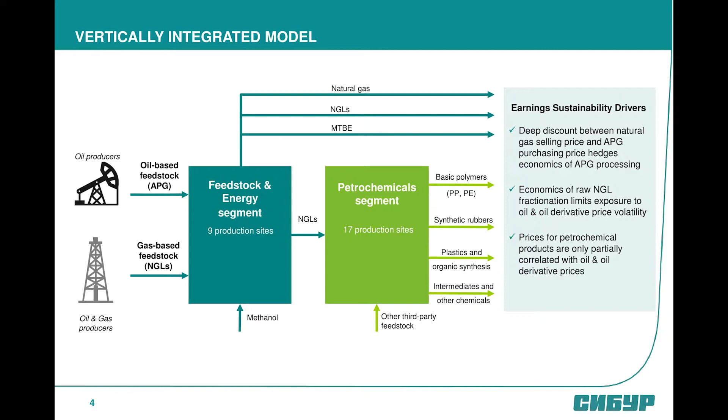To give you a brief explanation of the business model of SIBUR, we started with our feedstock and energy segment and explored the vertically integrated approach to build up our value chain segments. So we split the basic activities into 2 parts. The first one is feedstock, the core energy business for us, and the next level is petrochemical segments, which include not only the intermediates, organic synthesis products, but also the basic polymers, I mean polyethylene, polypropylene products,

and also synthetic rubbers. And the key point for the SIBUR strategy is to be on the safe side for our feedstock availability, and to have self-sufficiency in feedstock supply. So we have long-term partnership cooperation with oil and gas companies who provide us with feedstock material, I mean associated petroleum gas and natural gas liquids that are coming to our processing plants, gas fractionation plants, which then give the feedstock to our petrochemical units.

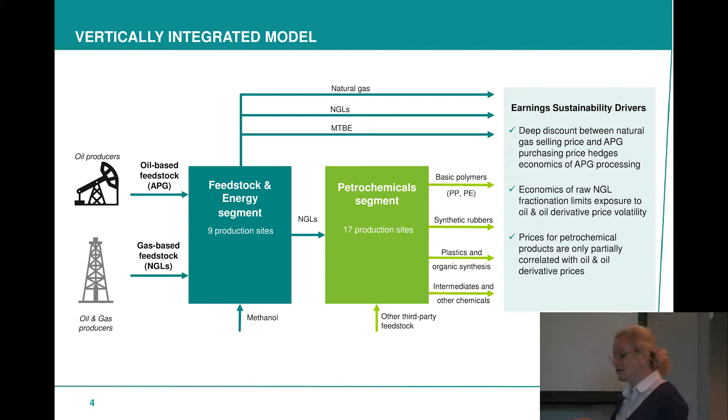And last year was the first time when the total revenue from the feedstock businesses was less than the petrochemical business. So we are growing, and we are growing exactly in petrochemical segments. So we are intentionally moving from the model of feedstock supply to the value-added chain, to the higher molecules.

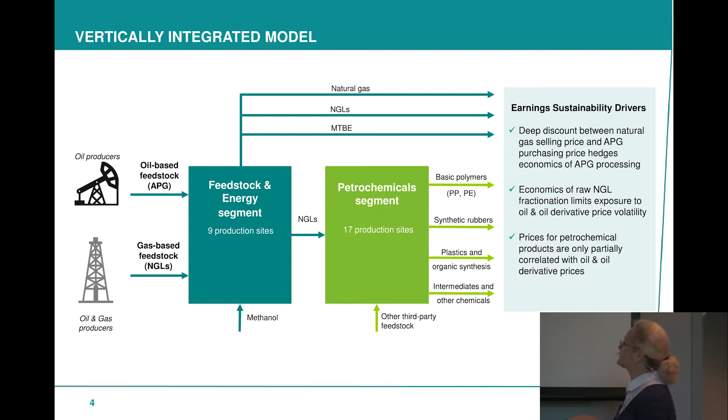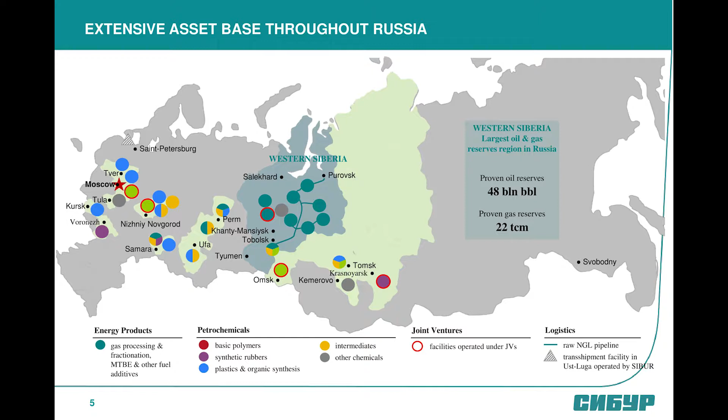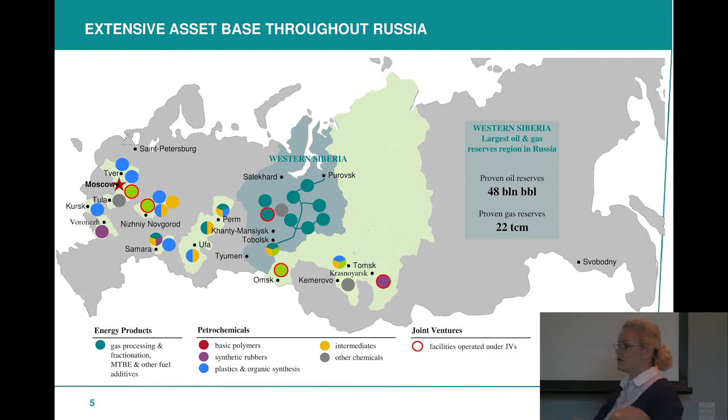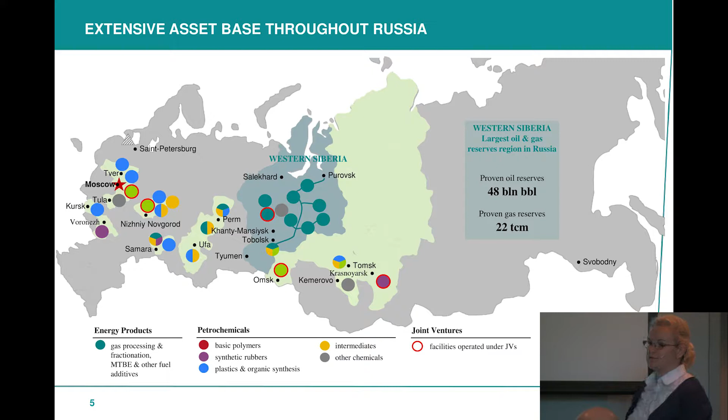Again, if we are looking at the map of SIBUR activities throughout Russia, due to the feedstock reasons, the core business is located in the West Siberia region. And SIBUR operates and manages the longest network of NGL pipelines in Russia, with the largest capacity of gas fractionation units in Tobolsk. So this is the heart of our businesses in West Siberia.

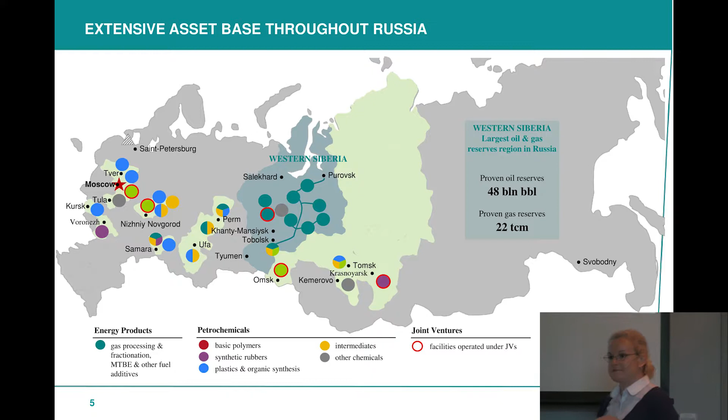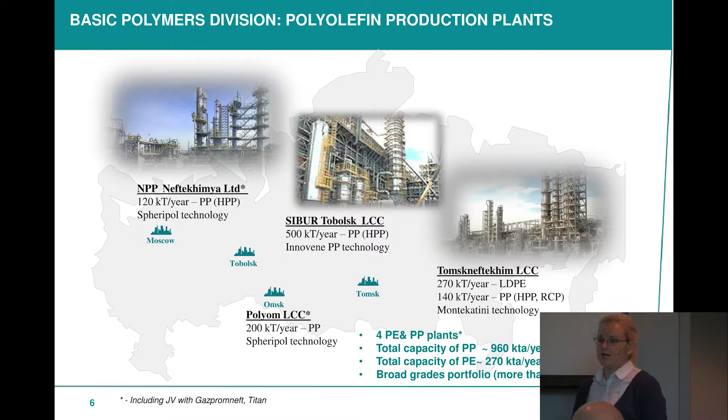If we're talking about the basic polymers business unit, which I present, we are talking about 4 units with total capacity of more than 1.2 million tons of polyolefins, and 3 of them are located in Siberia, and 1 is located in Moscow. If we are looking at the volumes, we need to note that these 2 plants were started only 4 years ago. So these are the latest technologies, and we operate world-scale capacities and quite new ones.

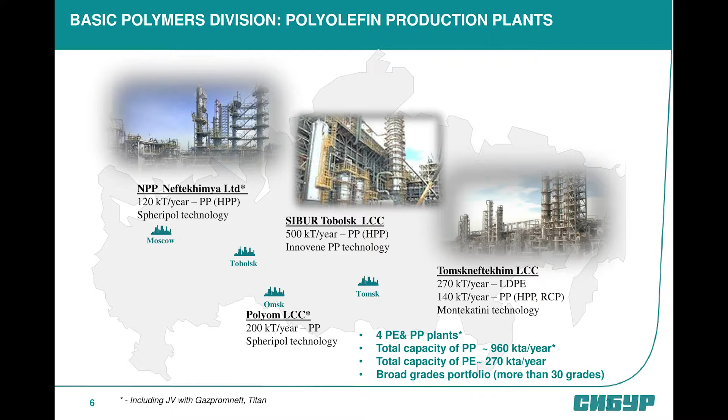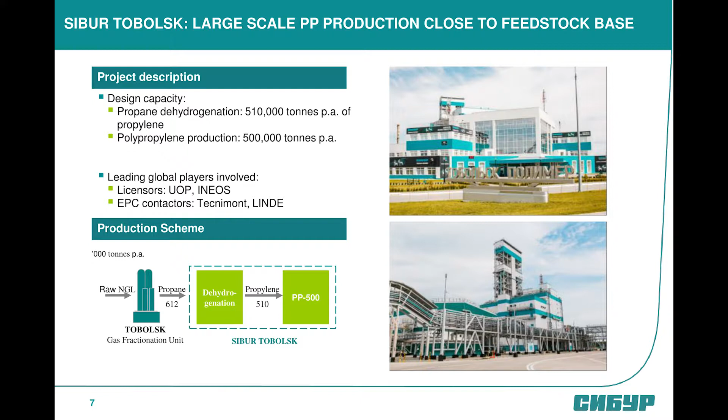The specific details I would like to share with you are about our Tobolsk location. This is the largest PDH unit that could consume all the propane coming from the gas fractionation unit, which then goes to the largest polypropylene capacity in Russia. So this project, which was started in 2013, was the first large-scale project and demonstrated our confidence in creating value-added projects.

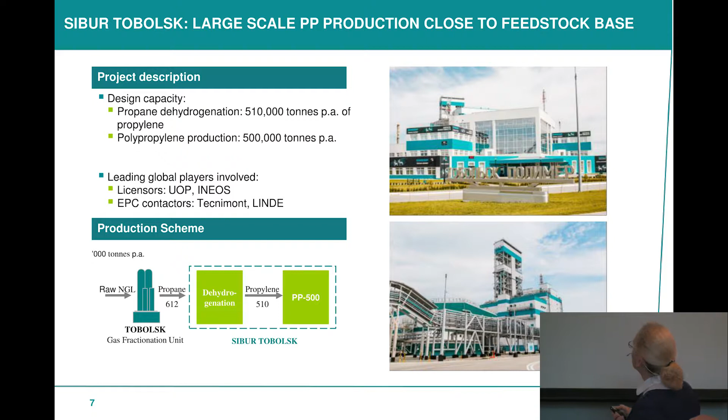In our key portfolio, we manage the broadest applications in polypropylene and also in low-density polyethylene. In collaboration with our clients, and this list is not the full list, we are interested in developing and investigating potential new applications with our clients for our mutual growth,

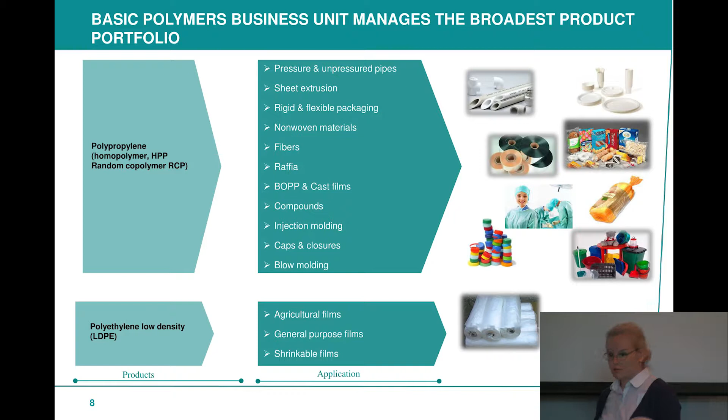and searching for new applications for the new products. Last year, SIBUR introduced its own brand name for polypropylene and polyethylene, and we take responsibility for the product quality, the services we provide to our clients, and stable supplies to our long-term partners. So the SIBUR brand covers most of these applications in polypropylene currently.

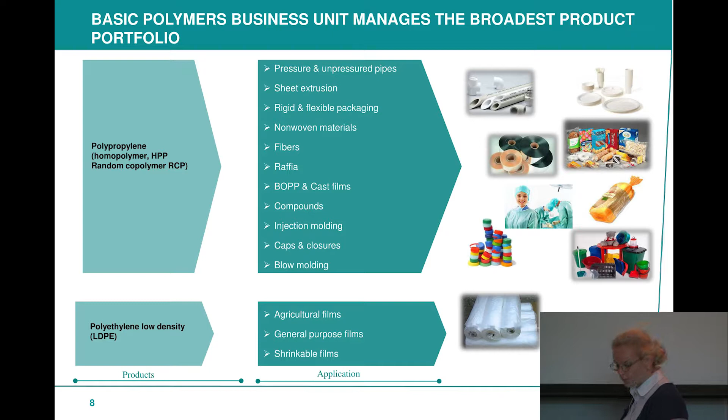It should be noted that we couldn't explore and develop most of these applications without the support of R&D activities. And here I'd like to present my colleagues from our NIOST R&D center, which is located in Tomsk. This is also in West Siberia.

And the NIOST center covers not only the basic polymers unit's requirements for materials development, but also the requirements of other SIBUR businesses, like the gas processing plant, development of petrochemical synthesis, catalysts, plastics and compounds, and also testing of additives for polyolefins and rubbers. So a very broad range of services. So next, move to the future.

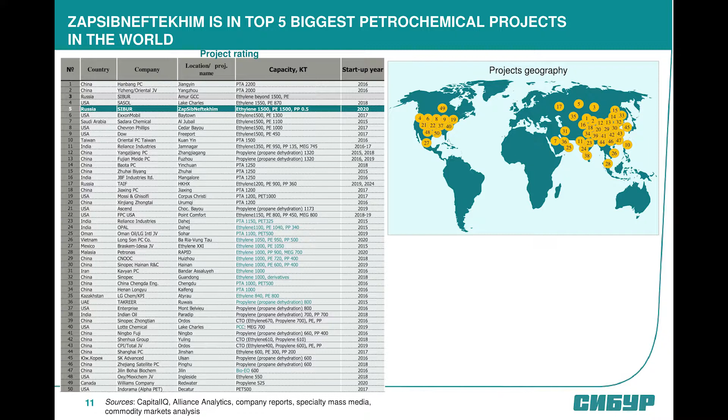I'm pleased to announce to you the coming project, which is currently under construction, and as you could guess, it's also located in West Siberia, specifically in the Tobolsk area. It's under construction and it will be started in 2020. It will take a place in the top 5 list of the world's largest petrochemical projects. And again, it will be a fully integrated complex, with our own feedstock supplied to the cracker unit and then polyolefins capacities.

If we look at the structure of the project configuration, this is the cracker, mostly a light feedstock cracker unit with 1.5 million tons capacity of ethylene and half a million tons of propylene, which goes to the 5 independent polymerization units. 4 of them are polyethylene and one is polypropylene.

And for our Tobolsk plant, we currently operate the same capacity in Tobolsk, so it will mean that we double our polypropylene capacity and will add 1.5 million tons of polyethylene. So in terms of the total volume, the total capacities in Tobolsk will increase 5 times. It's a big challenge for all parts and business units within the company, and we are preparing for the future. And really, we started it more than a year ago, I would say.

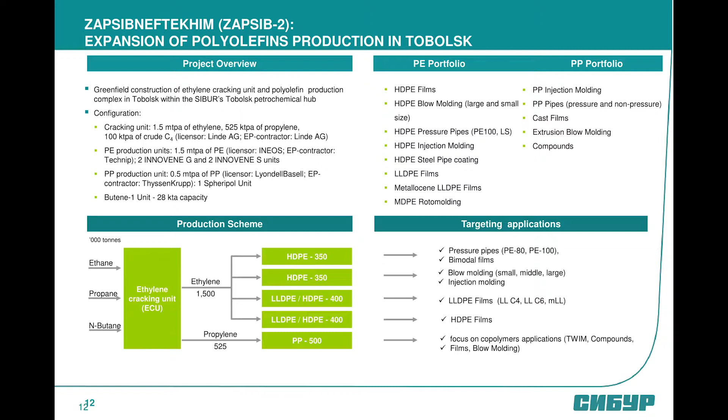Here I'd like to share with you our targeting applications, which our capabilities and technologies could offer us. In terms of polyethylene, of the 4 units, 2 of them are shown here, the first and the second. This is slurry technology, the Innovene S license, with capabilities for bimodal applications and pipe applications, and the third and the fourth are gas phase units, each with a capacity of 400 kTA, which gives us the capability to produce linear low density polyethylene and high density polyethylene.

These 4 independent units give us an exceptional advantage in flexibility of the portfolio within the broad range of polyethylene applications. For sure, our preliminary approach is to focus each line on targeting applications to avoid any difficult transitions and improve the operation efficiency.

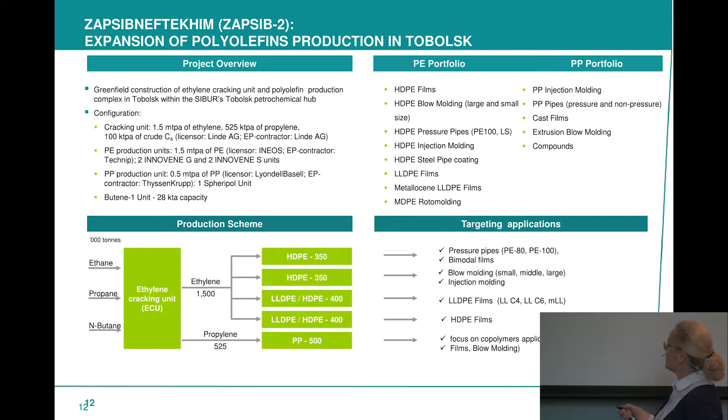In the case of polypropylene, this is LyondellBasell's Spheripol technology, and as far as most of our portfolio is focused on homopolymer polypropylene, thanks to ZapSibNeftekhim capabilities, we will focus mostly on impact and random copolymers.

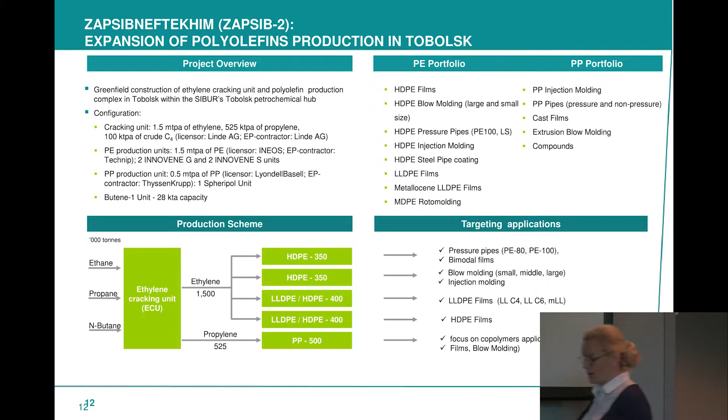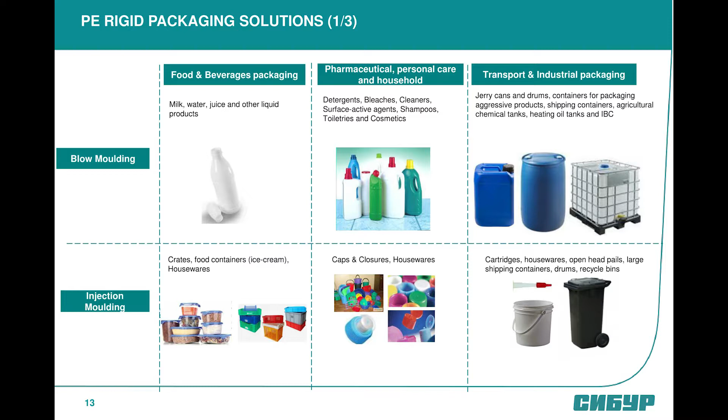Here I just briefly give the pictures of the main applications as we currently divide them ourselves. For us, it means different requirements from our clients depending on the processing technologies and depending on the final use. So for blow molding, we split small blow molding between food packaging and household, and medium size and large blow molding for industrial and transportation packaging.

For injection molding, the same approach with crates and containers, different types of houseware for food packaging, caps and closures, certain types of material needs, and also housewares and large size articles.

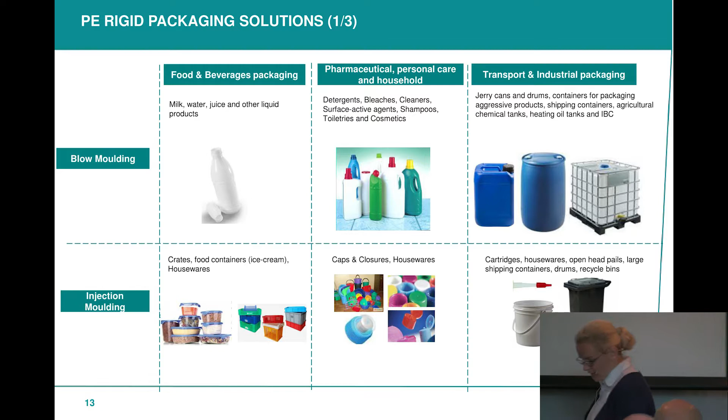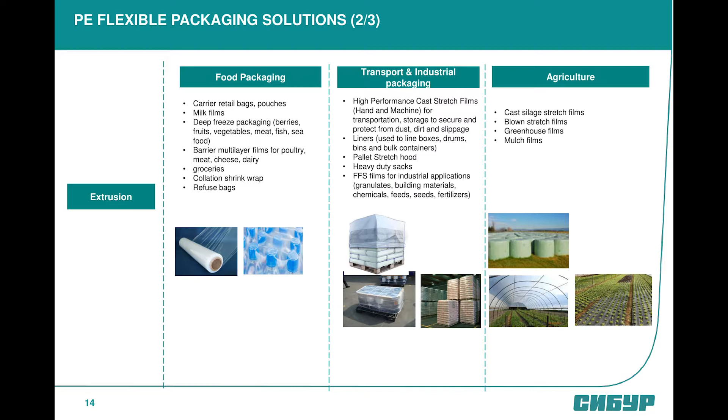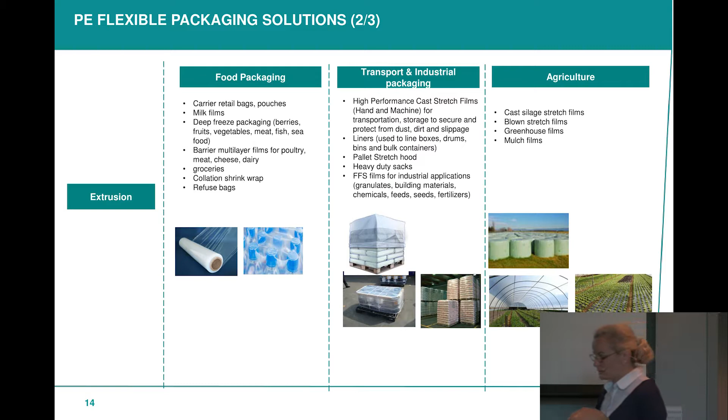For flexible packaging, we are firstly interested in expanding our portfolio. We currently have a good footprint in low density polyethylene thanks to our Tomsk plant, and we expect to have a synergy effect with the full range of polyethylene we could offer, with high density polyethylene, linear low density, and low density polyethylene for flexible packaging.

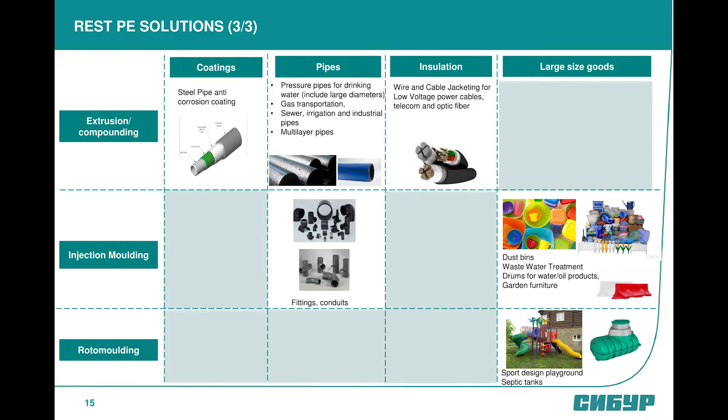Within the rest of the applications, the key point for us is the pipe segment. This is a crucial, important application for us at the local market and not only. For sure, one of our slurry PE units will be focused mainly on black bimodal PE100 black compound for drinking water and gas transportation.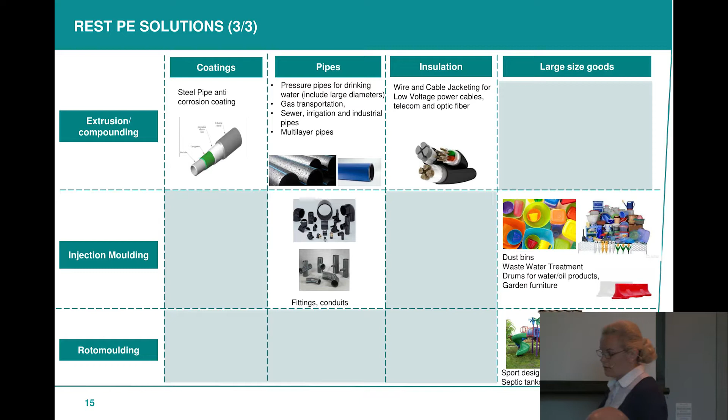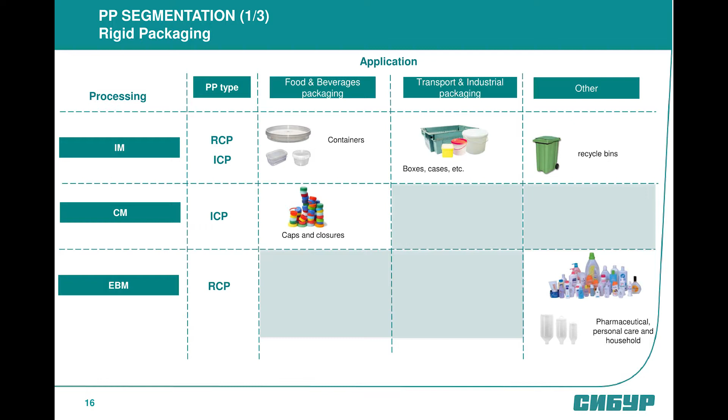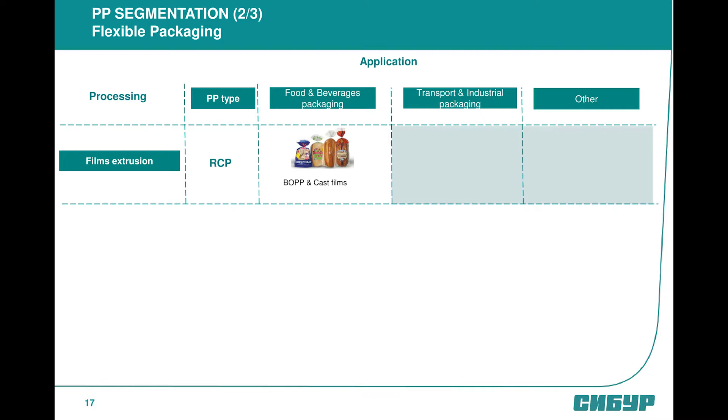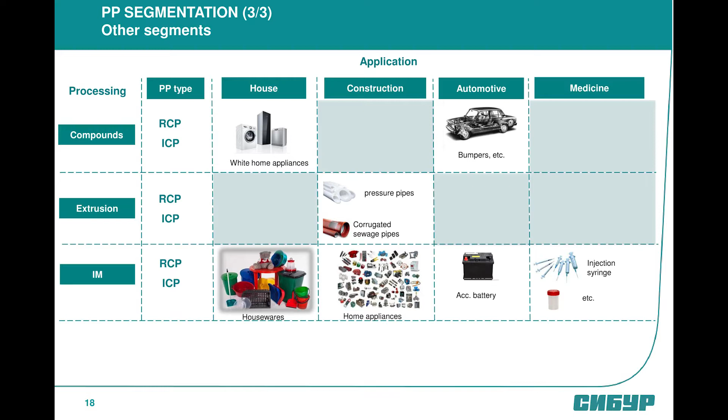In the case of polypropylene segments, we are focused on copolymers to expand our portfolio with random and impact copolymers. For the first step, we are looking at packaging, thin wall injection molding packaging, and films applications, and also we should pay attention to the compounding business for the home appliances and automotive industry.

For the pipe applications in PP, we currently supply random copolymer material, but only to the local market. But again, with new capacity, we expect to expand our portfolio of material for PP pipe applications.

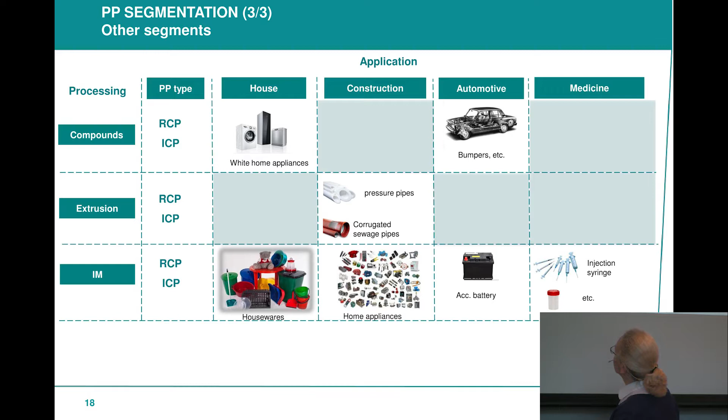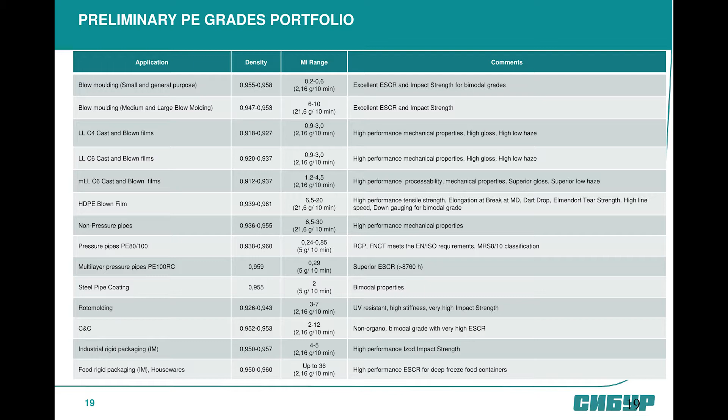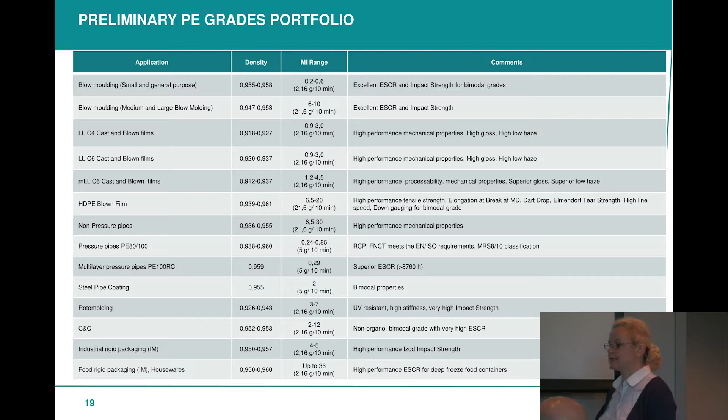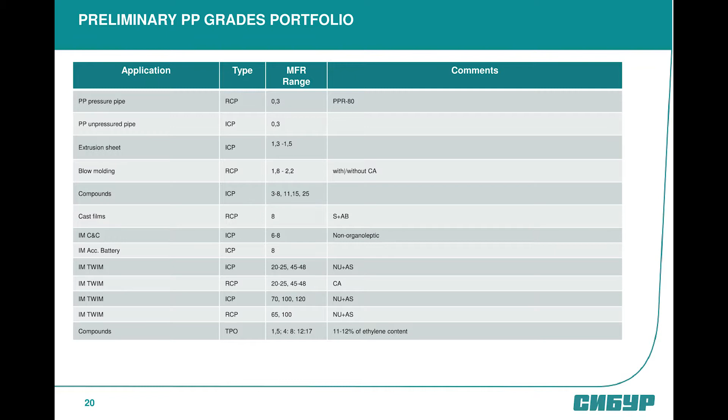Not to focus mainly on figures, but we preliminarily split the largest segments into the main applications and started our pre-marketing activities with our clients, current and potential, regarding their requirements to the materials, its properties, and its homologation period. Here I could share with you these tables, and if you like, we could discuss it in detail.

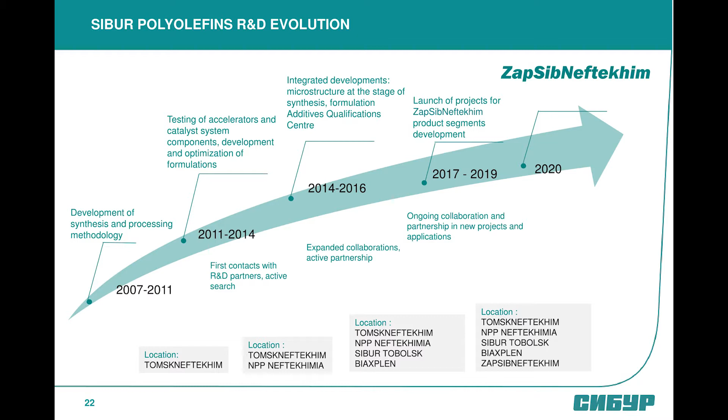It's obvious that we couldn't move forward without our R&D business evolution, which will be forwarded before our capacities start. Here is the general direction for the last 10 years of history, how we started our main R&D, core R&D activities in the polyolefins business, and how we expanded our geographies and locations, which were united and combined in our R&D projects.

I'd like to stay on the 2014 date, just as an example of the Additives Qualification Center project, which was started 3 years ago. This project could provide us with a single methodology and procedure for all additives coming to SIBUR for most of our basic polymers plants.

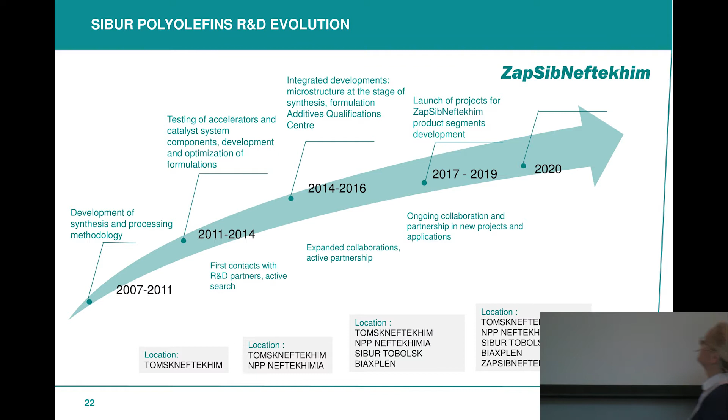I would like to share with you our ongoing projects in R&D. This is the strategy which is moving not only toward analysis of the polymer properties itself, but toward the advantages and adjusting the properties of the final product which our client produces from our pellets.

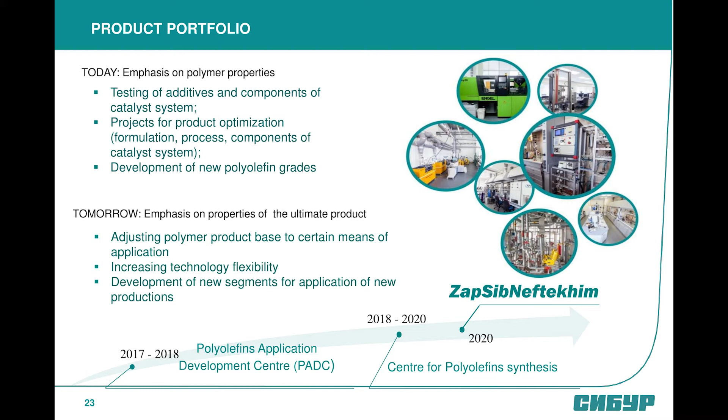It was an ongoing project established, which will start, we hope, next year: the Polyolefins Applications Development Center, which will be located in Moscow. On one side, we plan to combine the main types of processing equipment at industrial scale to replicate the processing technology at our client's side, and this could allow us to speak with our clients in the same language, to understand what kind of properties our pellets give to their final articles, films, fiber, bottles, or pipes.

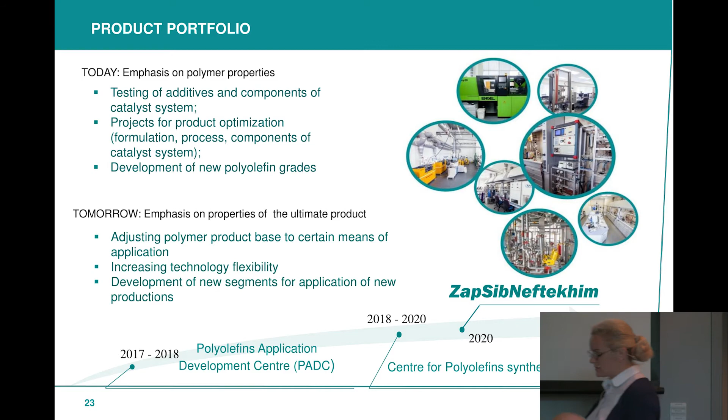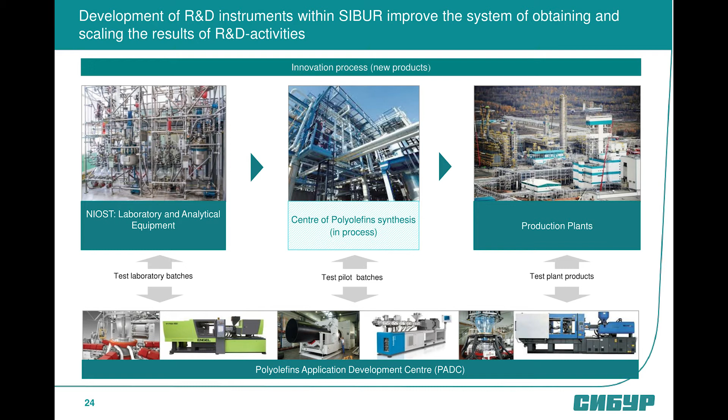Also, it should be noted as the next step of the full range of R&D services we provide: this is the Center for Polyolefins Synthesis. It looks very logical for us to move from the laboratory scale, not directly to the production plants and industrial capacity, but to have the possibility to adjust and improve the polymerization process through this type of pilot plant, providing test and trial runs at this center of polyolefin synthesis. So we could achieve the target properties before implementing into the production plant. It could reduce the number of trials at the production lines and keep us on the safety side due to industrial operations. So this is actually our dream: to offer the full services of R&D, from the polymerization process up to the final articles' properties design.

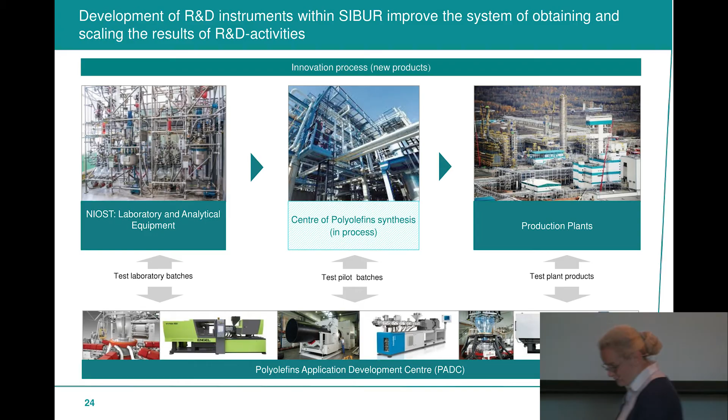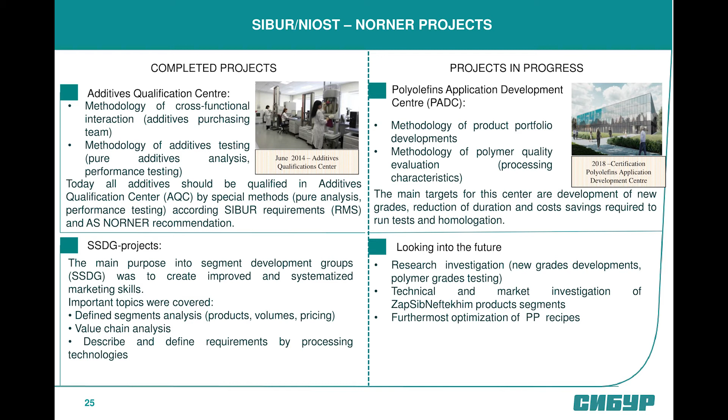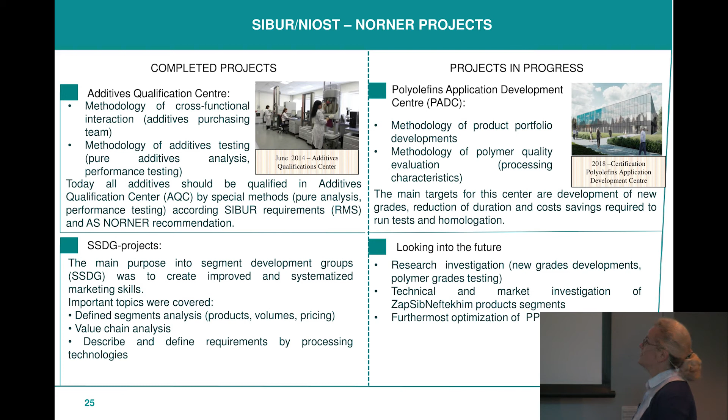Again, I'd like to thank Norner for the very exciting experience of collaboration with SIBUR. Here I selected the SIBUR, NIOST, and Norner projects which are already completed and which are on the way. As I mentioned, 3 years ago the Additives Qualification Center was started in Tomsk, which could provide us with a single qualification procedure and methodology according to SIBUR requirements and elaborated with Norner's recommendations.

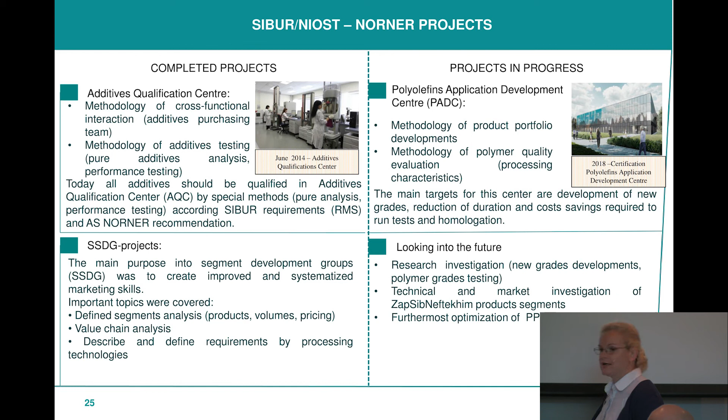And the second big project, mainly a marketing project, was connected with improving marketing skills and detailed segmentation analysis through our polypropylene portfolio, and better understanding the requirements of our clients for our products. The project currently underway is the Application Development Center, which will start next year. We are targeting the development of new grades thanks to this center, reduction in duration of homologation, and faster penetration into the markets meeting our clients' requirements. Thank you very much for your attention, and I'll be happy to answer your questions.